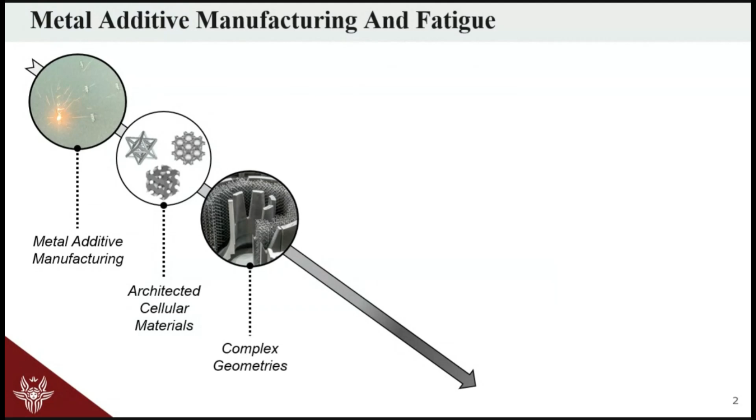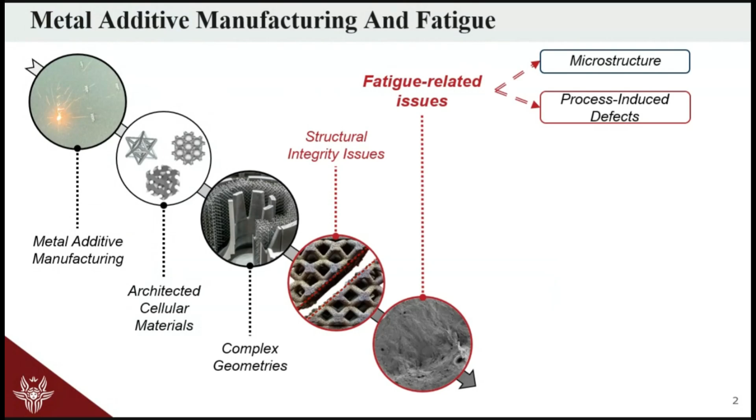We are dealing with additive manufacturing, in particular metal additive manufacturing and architected cellular materials. Probably most of you know this allows building really complex structures in a simple manner with tunable mechanical properties. Nonetheless, before the full spreadability over different industrial fields, ranging from biomedical to aerospace, there are still concerns hindering this spreadability, mainly associated to structural integrity issues, particularly fatigue-related issues. These are mainly associated to the microstructure, but in additive manufacturing, also to process-induced defects, due to the technology being complex and difficult to optimize and tune consistently.

These defects are mainly related to the differences between the as-built and as-designed geometries, and encompass, for instance, enhanced surface roughness, parasitic masses, and drosses at the lower skins.

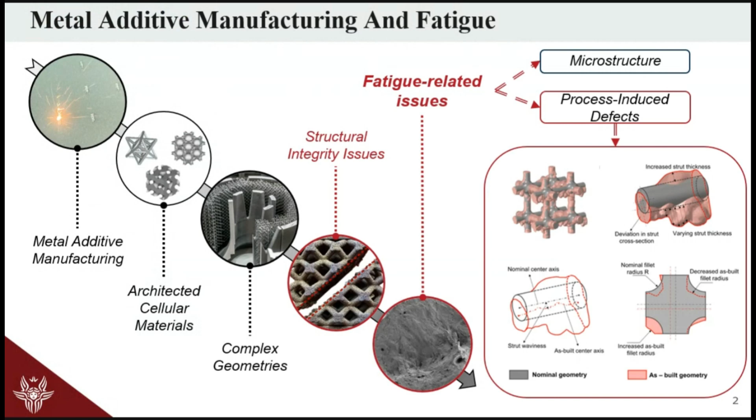Given this, when dealing with metal additive manufacturing, most of the time we're talking about laser powder bed fusion, one of the most industrially ready technologies. Nonetheless, even within laser powder bed fusion, we have several sub-technologies. For instance, changing the way the laser is emitted can alter the overall melt pool dynamics and the generation of defects inside a component. Indeed, the laser emission can be pulsed or continuous. As you can understand, if the overall melt pool dynamics changes, the fatigue behavior might also change.

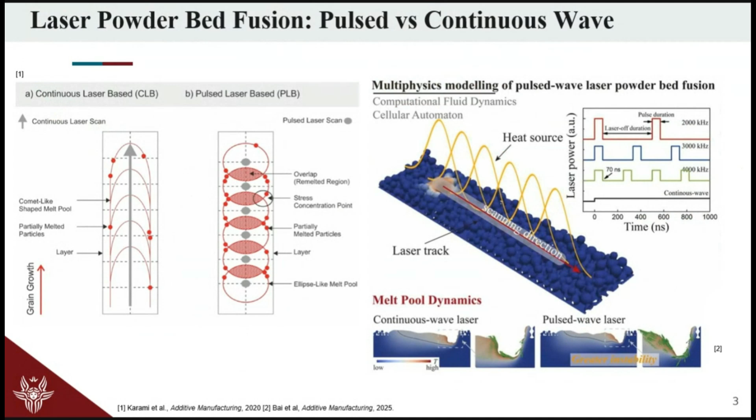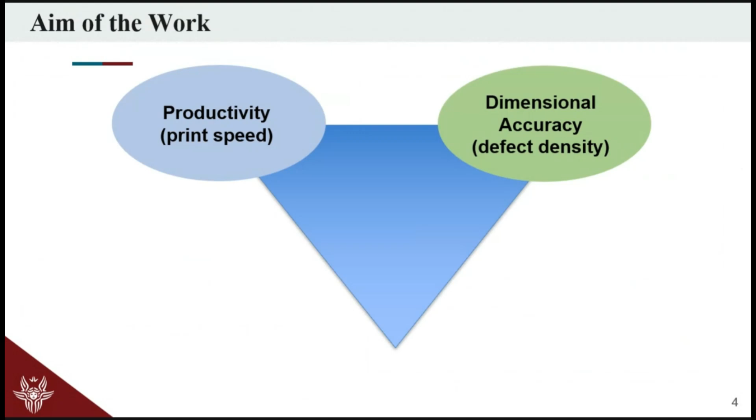If we see this from an industrial perspective, usually an industry wants productivity, so optimizing printing speed, while at the same time wanting dimensional accuracy, so good defect density and sensitivity. At this point, you can understand these requirements might be conflicting, so optimization processes are needed to balance quality over cost. Nonetheless, in most cases, these optimizations overlook the fatigue reliability of the component.

So the aim of this work is, considering two industrially optimized sets of parameters for two laser powder bed fusion technologies, continuous wave and pulsed wave, and considering Ti-6-4 lattices, to understand what the fatigue behavior is and if and how there are changes.

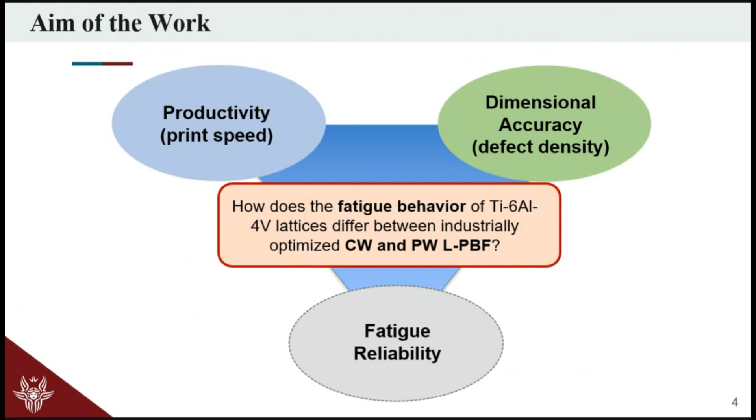To do this, we decided to adopt a bottom-up approach rather than printing overall lattice components. We decided to use sub-unital elements, the smallest repeating units inside the lattice, which are not the units themselves, but the struts. Why this? The reason is twofold. First, there is a saving of money in order to print more specimens at lower cost. Second, because fatigue is a localized damage phenomenon, if we understand how failure occurs and the fatigue properties inside these specimens, we can scale up to the overall lattice component.

To do this, we designed some specimens, which we call thin struts, which mimic the struts of a lattice, at three different building orientations, 90, 45, and 15 degrees with respect to the build plate, with a nominal strut diameter of 670 micrometers and an overall gauge length of 2.4 millimeters.

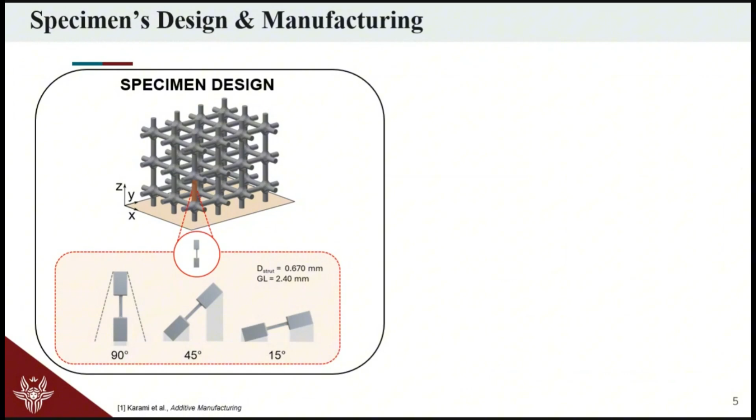These specimens have been printed according to the before-mentioned manufacturing processes, considering optimized parameters in order to balance printing quality and cost. Of course, if we want a comparison, we need to have something fixed or at least constrained in order to have the closest comparison possible. To do this, we decided to keep the same layer thickness, same feedstock powder, as well as comparable energy density per track width.

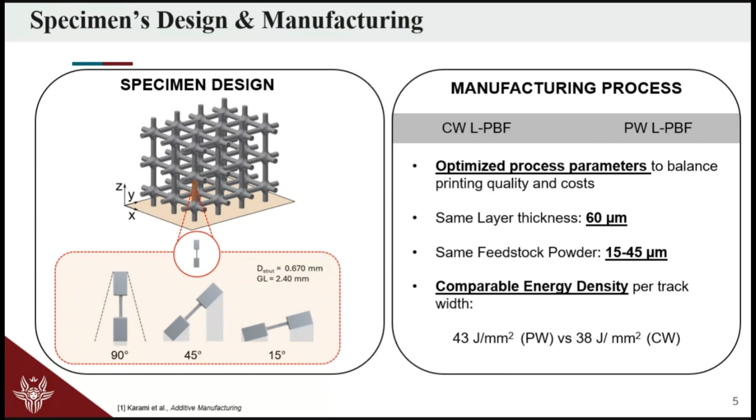Given this, these specimens should be considered in their as-built conditions, so no kind of post-processing treatment has been done, rather than a classical heat treatment to have either stress relieving or the transformation change from martensitic to alpha plus beta phase.

Before going through the experimental campaign, it's important to have an overall morphological analysis of the components, since process-induced defects are really important for fatigue.

Understanding the deviations between the as-designed and as-built structure is really important. We performed a fast and cost-effective stereoptical image analysis approach, collecting two images, one horizontal and one vertical, flipped 90 degrees with respect to each other. Through image processing done in MATLAB, which can be extended to any other solver, we assumed an elliptical cross-section to build up the cross-sectional data of each specimen over the gauge length, considering the average and minimum cross-section.

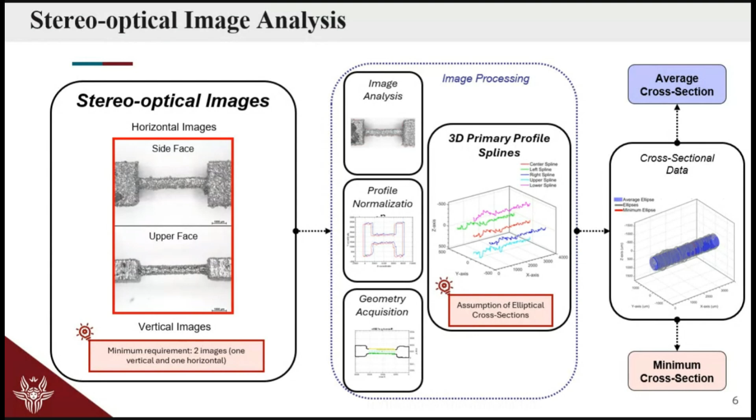We decided to employ the minimum cross-section for the fatigue analysis, as you will see later. Most importantly, we can compare the overall preliminary results of the printing. The pulsed wave and continuous wave laser powder bed fusion differ not only between different angles within the same technology, but also critically between manufacturing technologies. There is an overestimation of the cross-section for pulsed wave laser powder bed fusion, while there is an underestimation with respect to nominal values for continuous wave laser powder bed fusion, meaning the load-bearing area for pulsed wave is larger than for continuous wave.

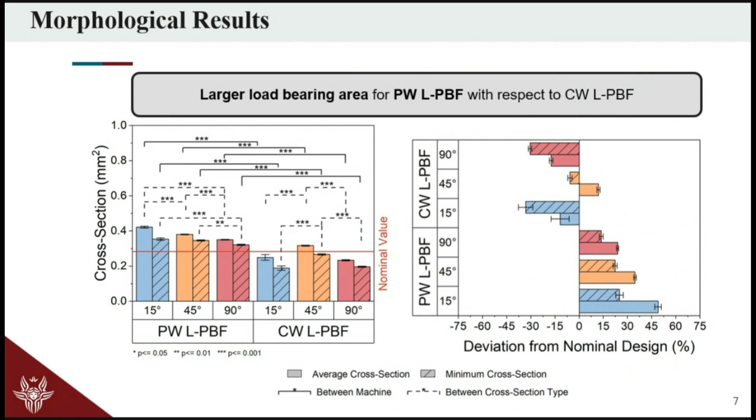As anticipated, we are using the minimum cross-section for our fatigue data analysis. Fatigue tests were done at R equal to -1 in mode 1, and these are the SN curves, Wöhler curves, of the components for pulsed wave and continuous wave according to the three different building orientations.

Why the choice of the minimum cross-section? Because this way we can already account for the differences in morphology, at least in a preliminary stage. If we had used the nominal cross-section, we would have had much larger discrepancies, which would not account for this difference.

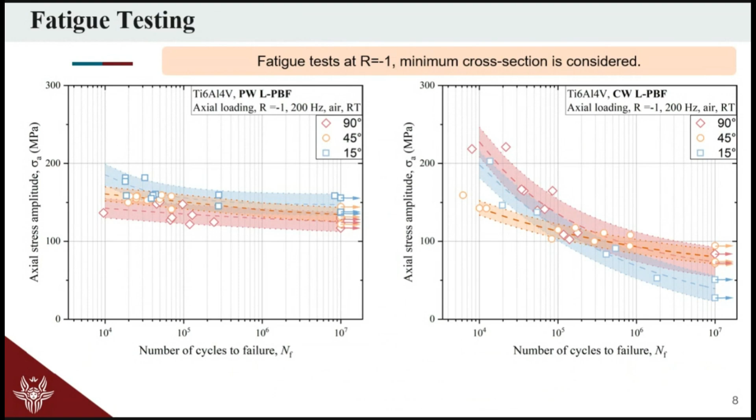Given this first look at these graphs, we can clearly say that pulsed wave laser powder bed fusion reports higher fatigue strength compared to continuous wave laser powder bed fusion for any given building orientation.

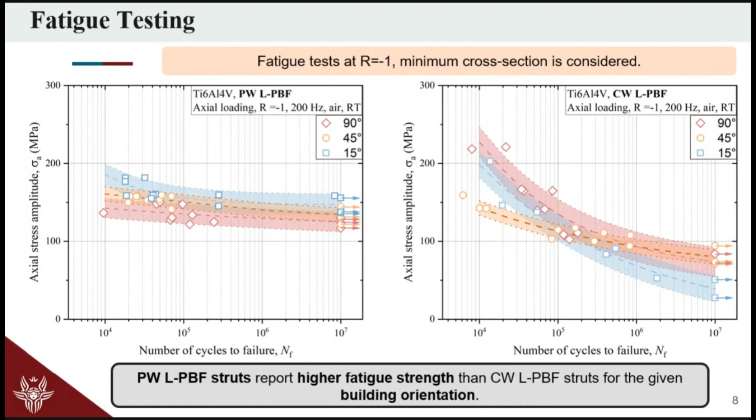However, looking closer at the different trends at fixed angles and fixed cycles—10 power 5, 10 power 6, and 10 power 7—we can clearly see these trends tend to increase with increasing numbers of cycles. Particularly for 90 degrees, there is a perfect match at 10 power 5, which instead tends to decrease with increasing numbers of cycles.

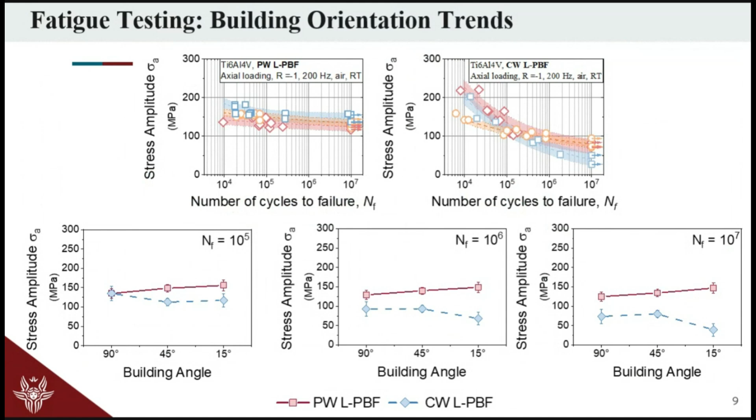So why does this happen? Can we explain these trends? When we talk about fatigue strength, we consider it a function of the base material, the architecture, and the fabrication process. But if the base material is the same and the architecture is the same, this suggests the fabrication process is the key difference.

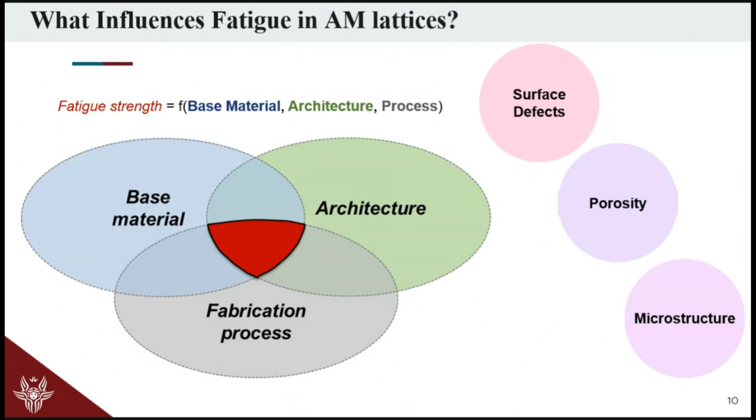We are analyzing surface defects, porosity, and microstructure, which might be the driving phenomena leading to failure. Starting with surface roughness analysis done on both cases for all building orientations, we have two parameters of interest, RA and RV, as well as SA and SV. We can consistently see statistically significant differences between pulsed wave and continuous wave, particularly at inclined angles.

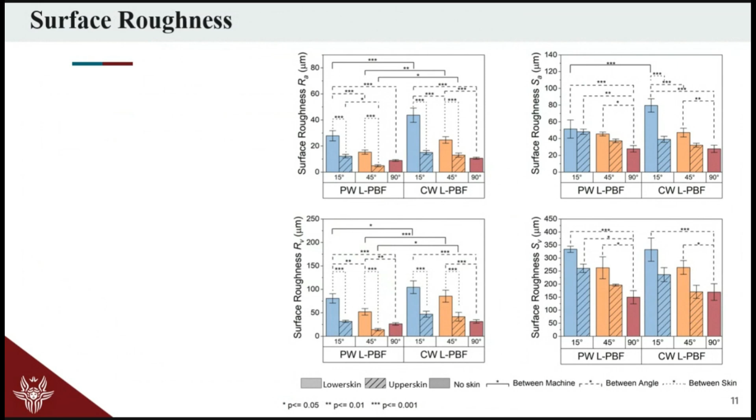However, when dealing with 90-degree specimens, we do not see any statistical difference. This, if you recall the graphs before, suggests that surface roughness is probably not the driving mechanism leading to the discrepancies in fatigue resistance between the pulsed wave and continuous wave laser powder bed fusion struts.

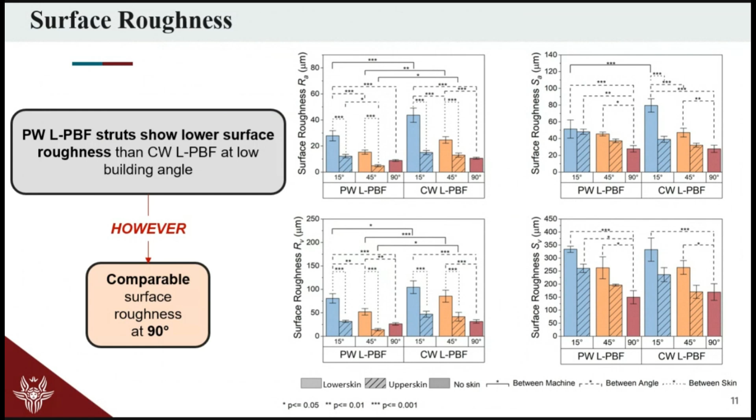So the other logical step is to go through the porosity analysis. This has been done by cross-sectioning several specimens at different heights of the gauge length in the Z direction, considering the Murakami area parameter in the XY direction, the distance from surface, and the circularity of the pores. We can see that in the case of pulsed wave laser powder bed fusion, there is a higher tendency, particularly at 90 degrees, for critical pores to be located near the change between the contour and the bulk part of the strut.

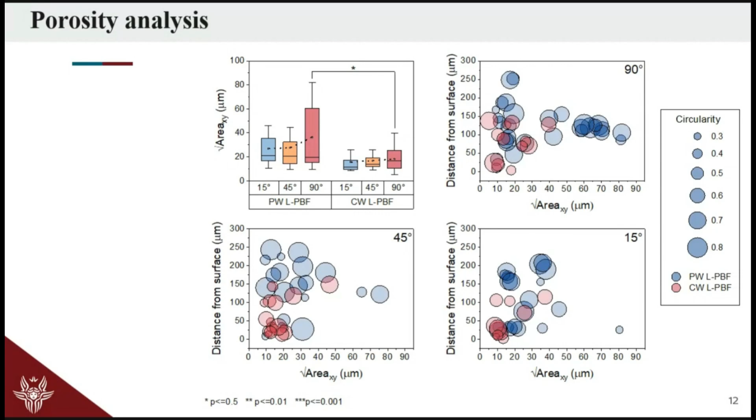This would suggest, preliminarily, that this might be the driving mechanism. But if you remember the graphs before, it's basically flipped, because the pulsed wave laser powder bed fusion reports a higher fatigue strength with respect to the continuous wave. So again, probably this is not the mechanism.

In this case, if we look at the 90 degree case study, there is an increase in the fatigue strength difference with an increase in the number of cycles. This cannot be explained either by the surface roughness analysis or by the porosity. So most probably it's related to the microstructure. How did we deal with that?

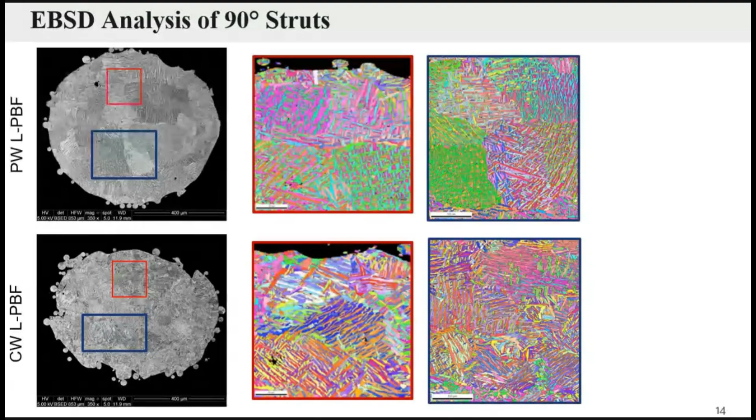We did some EBSD analysis of the 90 degree struts and checked the overall microstructure morphology. As you can already see, there are clear differences evident in these SEM images. In particular, these differences are not related to the alpha grains, which are comparable in size and length, but are mainly related to the prior beta grain reconstruction.

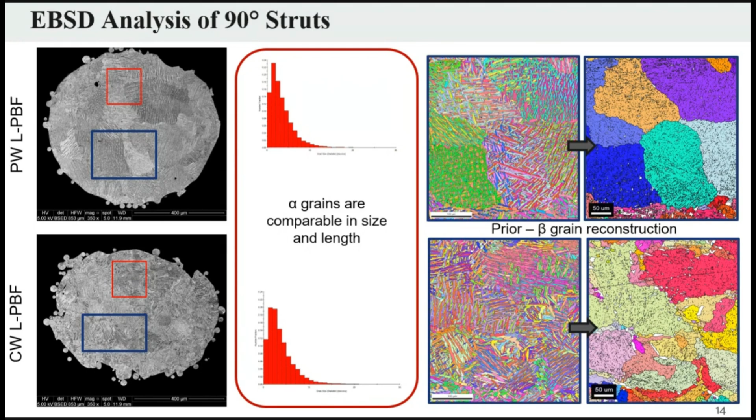In particular, you can see that for the pulsed wave there are way larger grains with respect to the continuous wave laser powder bed fusion. But how does this impact on fatigue?

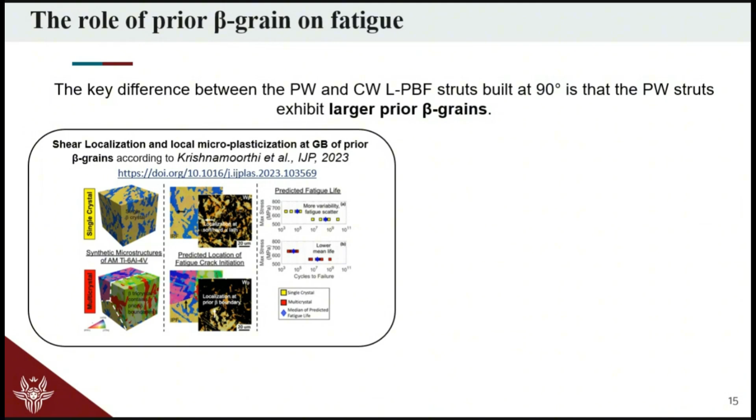The answer was given basically by the literature, by a beautiful paper published in the International Journal of Plasticity in 2023 by the group of Sangid, on a crystal plasticity model on Ti-6Al-4V. Basically, larger beta grains mean a lower density per volume of the grain boundaries. This means you can have easier dislocation slip transfer, less plastic strain localization, which impacts delayed crack initiation, and so a higher fatigue strength.

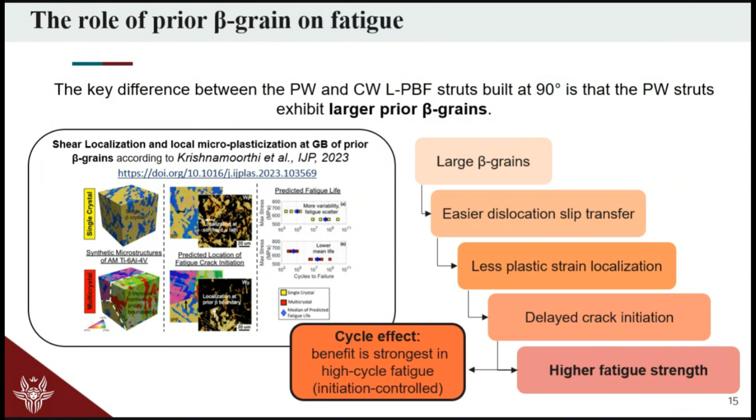However, the nice thing about this is that it's also cyclic dependent, in the sense that this benefit is stronger the higher the fatigue life is, because we are in an initiation-controlled domain rather than a bulk plasticity domain, in which instead the plastic strain localization tends to be more widespread over the overall cross-section.

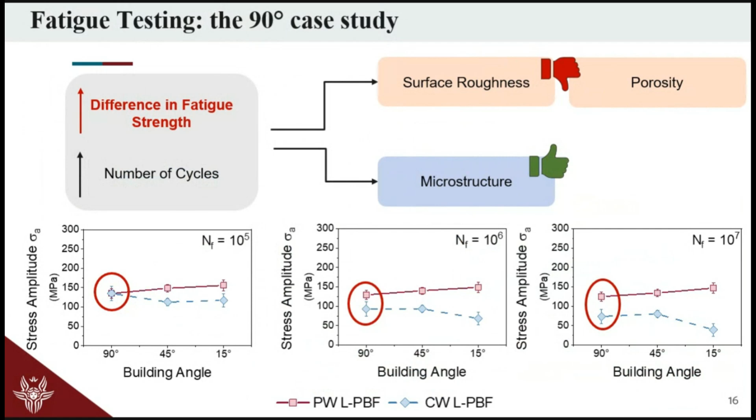Given this, we can explain not only the differences between the continuous and pulsed wave laser powder bed fusion struts at 10 to the power 6 and 10 to the power 7 cycles, but also why at 10 to the power 5 cycles we have a sort of perfect match of the fatigue properties.

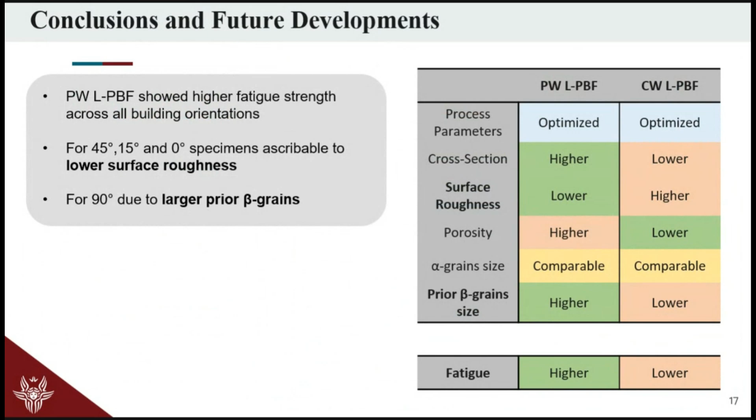At this point, just to conclude, given two optimized process parameters aimed at balancing cost versus overall quality, we can say that with this set of parameters—which doesn't mean that for every condition pulsed wave is better than continuous wave—but for this set of parameters, generally at any building orientation, we have a better fatigue strength for pulsed wave due to a higher cross-section, a lower surface roughness, and also a prior beta grain size which is higher. So the statistical chance of localization of plastic strain at the boundaries is reduced.

Given this, for future developments—of course this is at a preliminary stage—we would like to extend this EBSD analysis not only to the case of 90 degrees but also to the cases of 45 and 15 degrees, and then try to develop a quantitative model which accounts for the combined effect of both the microstructure and the surface defects.